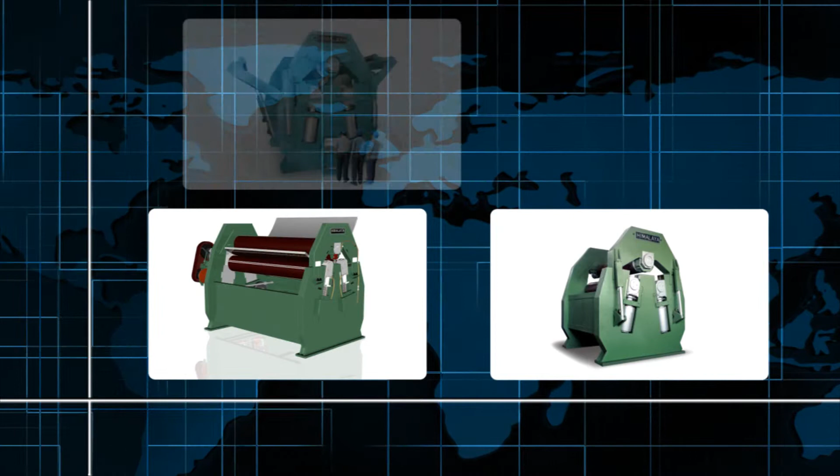This video presentation is a humble attempt to provide fair information about plate bending machines to all prospective buyers. If you are planning to buy a plate bending machine, this presentation will help you make the right decision that is in your best interest.

There are primarily two types of plate bending machines available in the market: 3-roll machines and 4-roll machines. In many ways, both of these machines are similar, and in some ways they are different. Both types work similarly for the operations of pre-bending, rolling and post-bending.

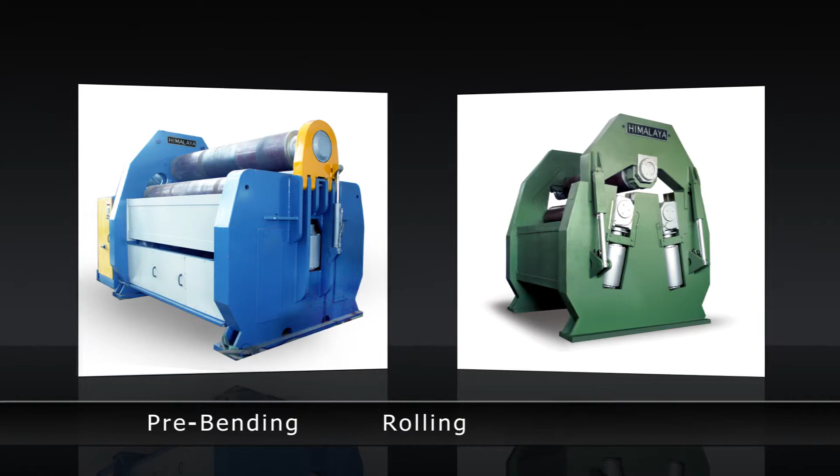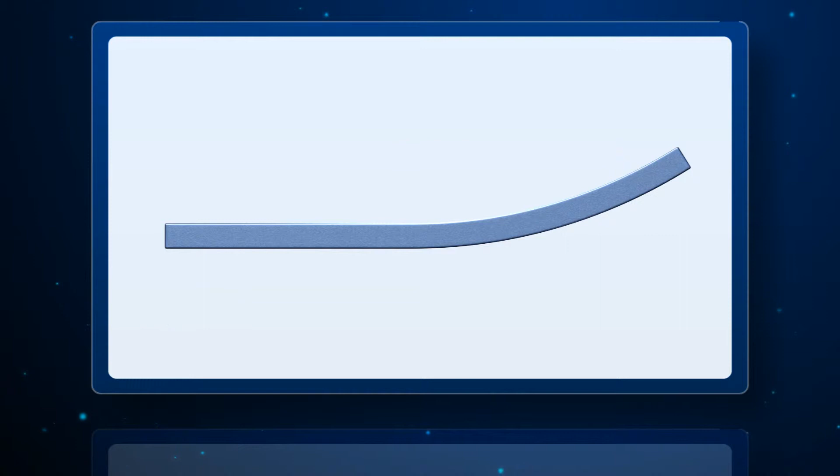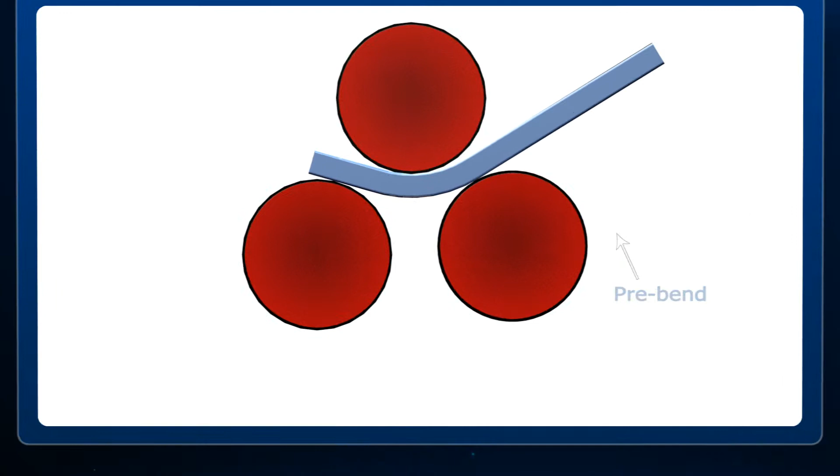The bending process requires that the workpiece is supported at 2 points and force is exerted at the third point. In pre-bending, also called pre-pinching or edge bending, a 3-roll machine works this way: the plate is gripped between one of the bottom rolls and the top roll, while the other bottom roll is raised upward to pre-bend. The gripping bottom roll moves down slightly due to hydraulic pressure relief. This generates the required bending lever arm, which is equal to the flat end at the plate edge.

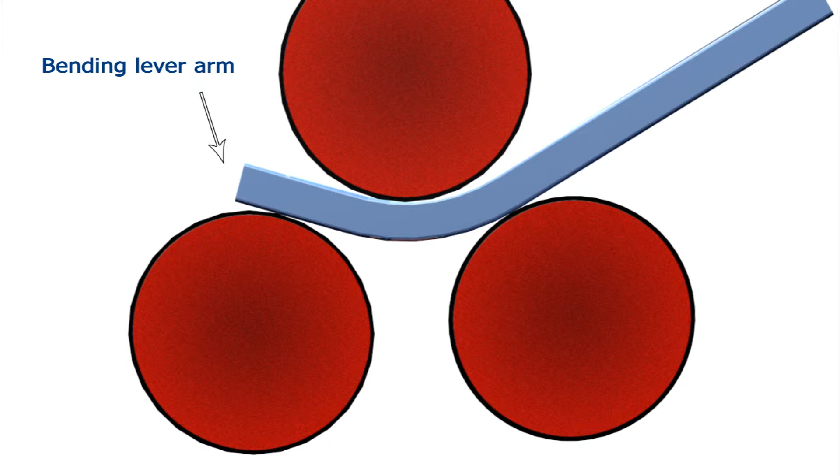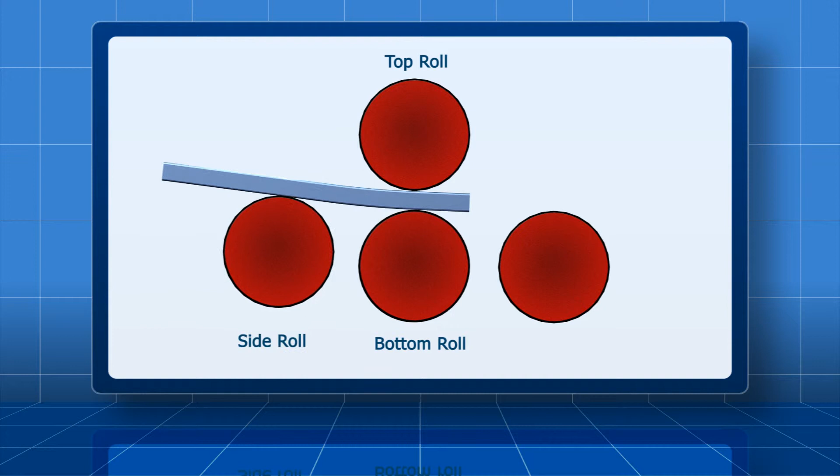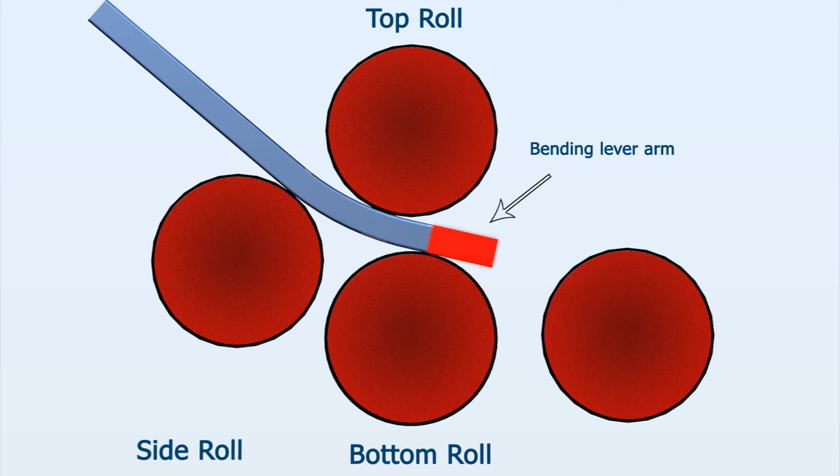4-roll machines also work in the same way. Here, the plate is gripped between top and bottom roll. One of the side rolls is raised upward to pre-bend. The bottom roll moves down slightly and a bending lever arm is created. Here too, the flat end at the plate edge is equal to the bending lever arm.

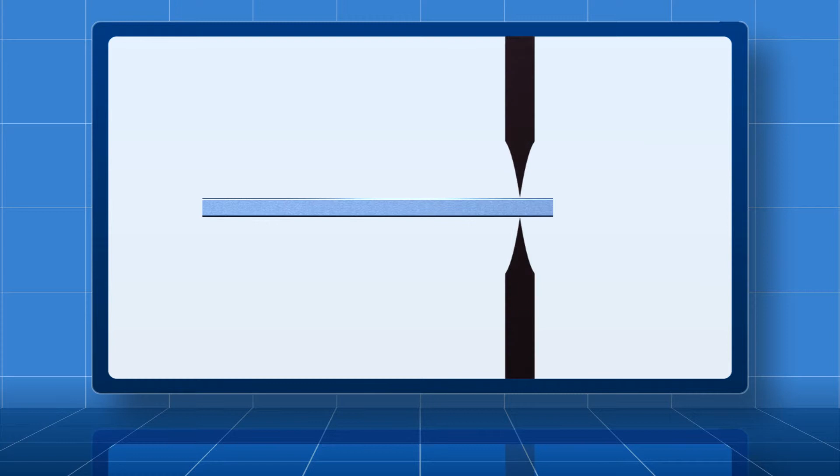At this juncture, let us try to understand a hypothetical situation where we try to bend a plate with both supports perpendicular to the plate at the same point. As you can see, the plate will not bend but just hinge.

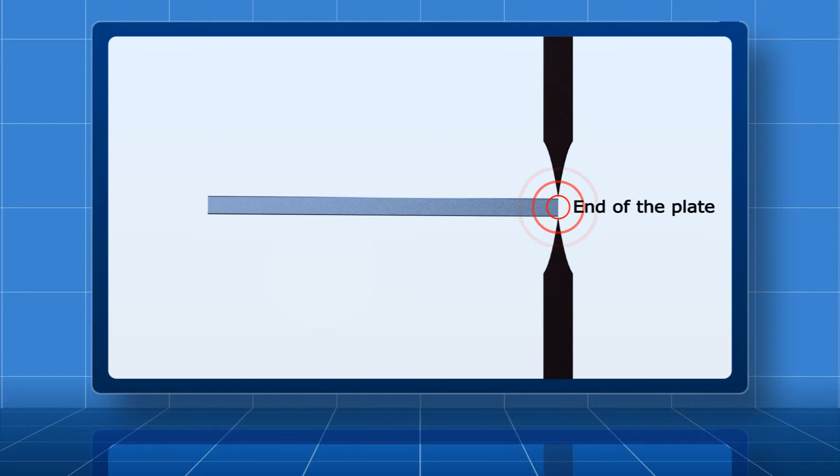Let us go one step further. What happens if these supporting points are placed at the end of the plate? If you try to bend it by raising the other bottom support, the plate will come out of the grip.

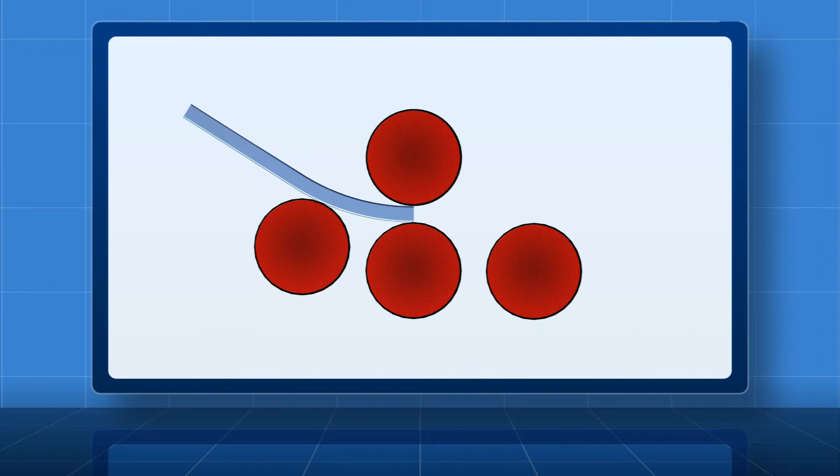This is exactly what happens if you try to bend a plate in a 4-roll machine, keeping the edge of the plate this way. This means that by gripping the plate at the end, you cannot create zero flat end edge bending.

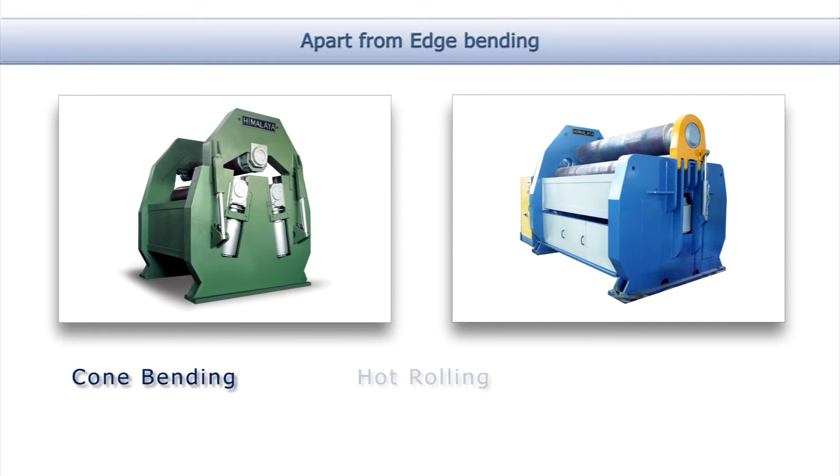Apart from edge bending, both 3-roll machines and 4-roll machines are similar in cone bending, hot rolling and non-circular bending operations. Both of these machines can be fitted with PLC and CNC controls.

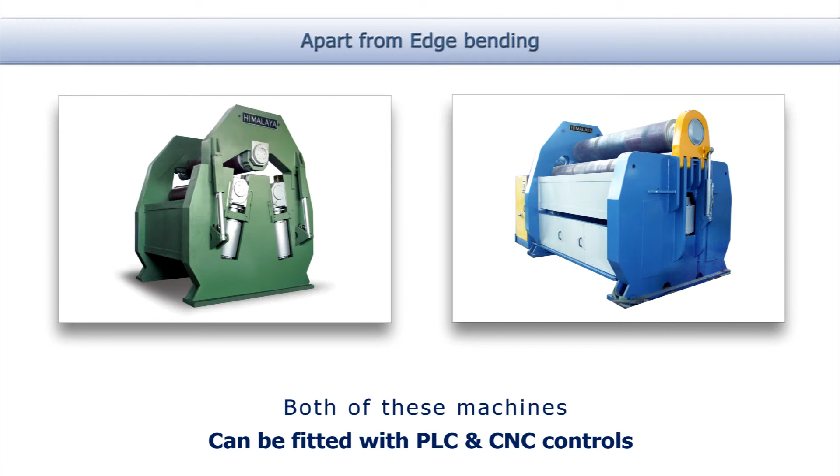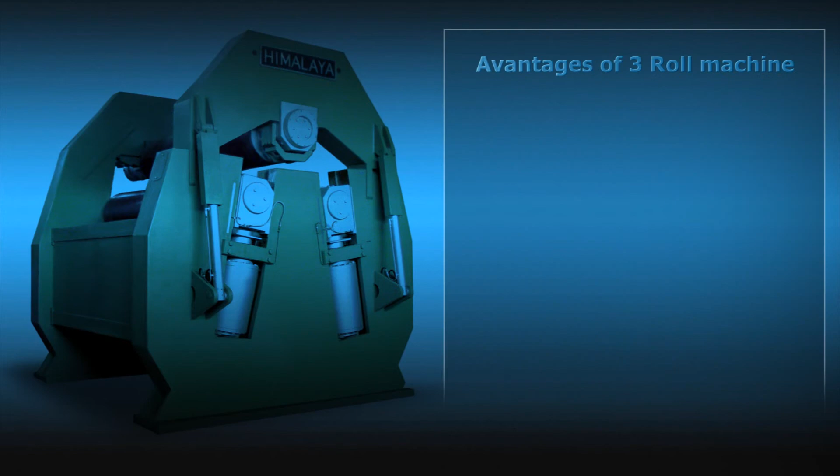Despite so many similarities, 3-roll plate bending machines are the preferred choice of customers because they offer some startling advantages over 4-roll machines. The first and foremost advantage is the cost.

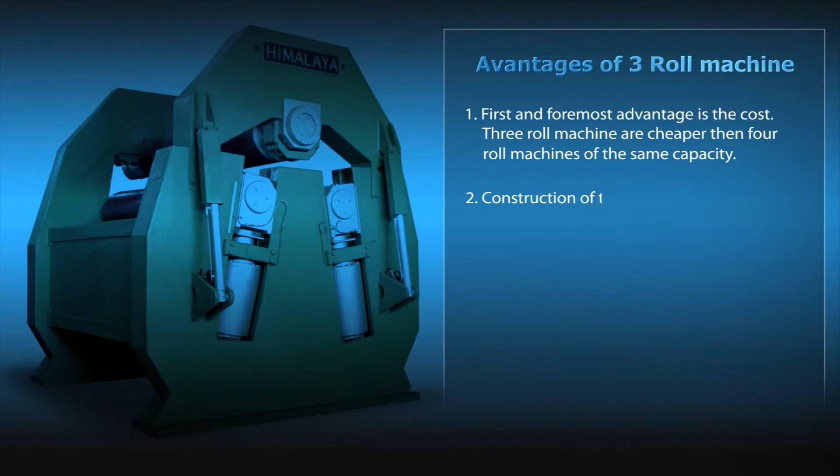3-roll machines are cheaper than 4-roll machines of the same capacity. Construction of 3-roll machines is compact compared to 4-roll machines of the same capacity. This makes it easier to mobilize and it requires less floor space.

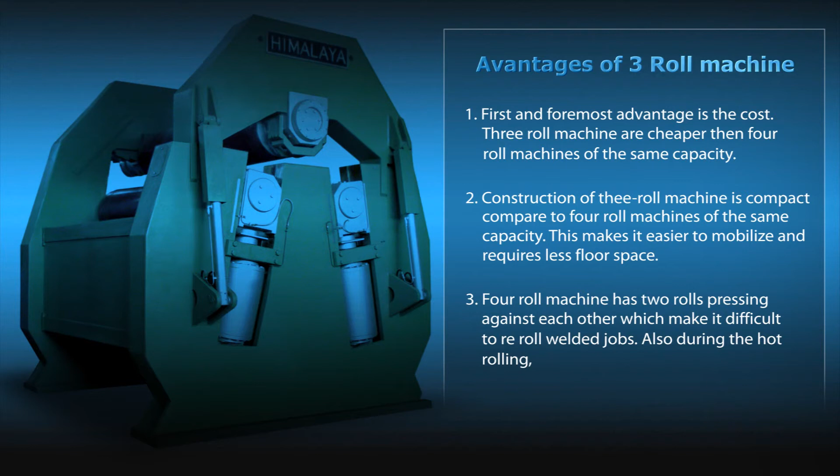A 4-roll machine has 2 rolls pressing against each other, which makes it difficult to re-roll welded jobs. Also, during hot rolling, plate thickness may reduce due to direct pressure from the bottom roll.

We believe that this information will help you make the right decision that suits your need.